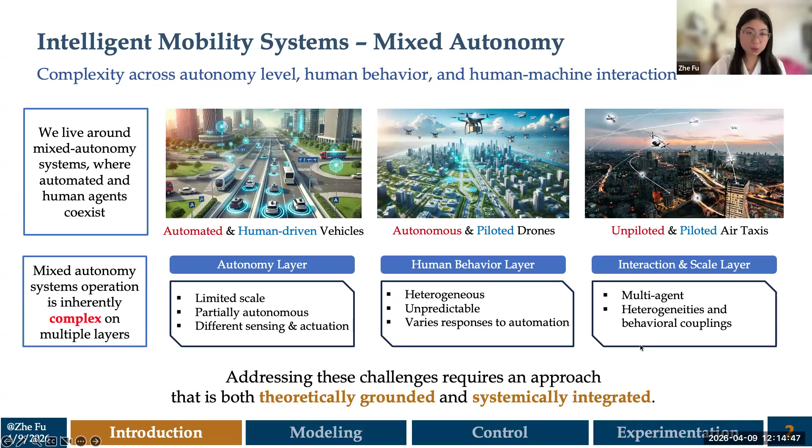So altogether, these factors make mixed autonomy systems very challenging to model, predict, and control. So addressing these challenges requires an approach that is both theoretically grounded and systematically integrated. So what do I mean by theoretically grounded? My approach is what I call model-informed learning, which means embedding physical principles and structural models into learning to achieve both interpretability and data efficiency.

So let's take a step back. In today's data-driven era, it's tempting to think we can solve every problem by just collecting more data and training larger models. But pure data-driven learning has clear limitations. It demands huge amounts of data and computational resources. It often lacks interpretability or physical consistency, and it generalizes really poorly when facing new or noisy environments.

Yet, before the era of large-scale computation, we already had centuries of physical and behavioral modeling, like governing laws, conservation equations, structural priors, and all the analytical models. So instead of discarding all these models, why not integrate them? By combining the expressiveness of data-driven learning with the discipline of physical and structural modeling, we can build models that are more data efficient, interpretable, and generalizable.

On the other hand, I believe that in complex systems, for example mixed autonomy systems, or our general mobility systems, to make a real impact, we need to co-design. And what do I mean by that? Instead of treating modeling, control, and experimentation as separate stages, where one comes after another, I view them as parts of closed loop systems that evolve all together.

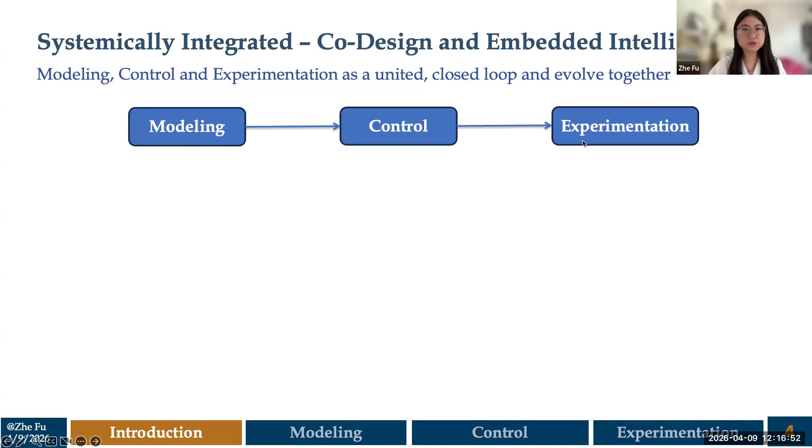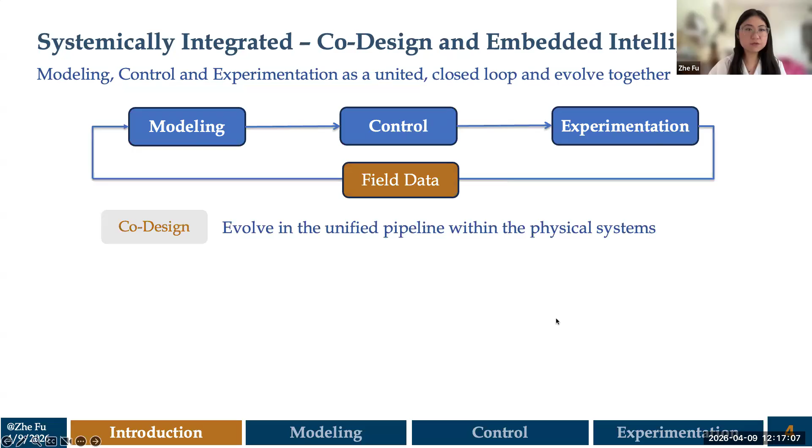So modeling informs control design, control design drives the experimentation, and experimentation generates feedback and field data, while the field data in turn refines the modeling. So this continuous loop is what I call co-design. Each component evolves in a unified pipeline within the physical system.

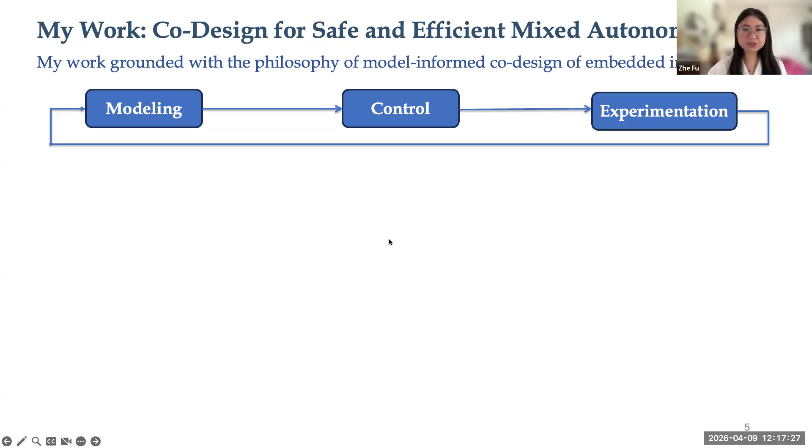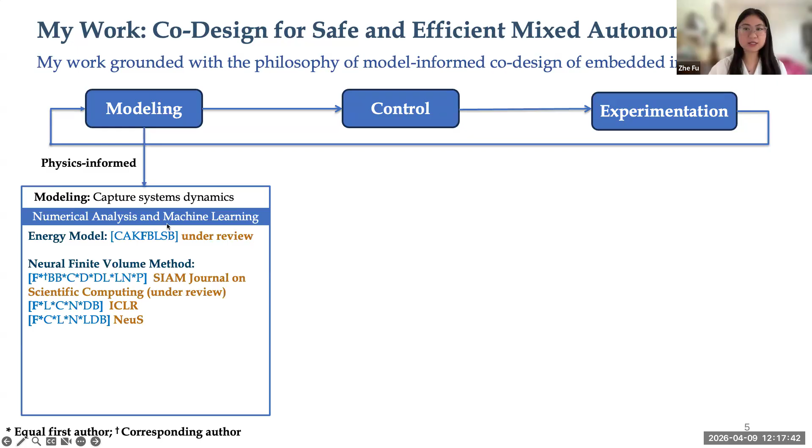So at a high level, my research is grounded in a model-informed co-design philosophy, and I view complex cyber-physical systems as requiring these three components. During my PhD, my work spans all three layers. Here is a brief research summary. On the modeling side, I combine numerical analysis and machine learning to model large-scale systems such as energy consumption and traffic flow. And on the control side, I mainly use control theory and deep learning to design algorithms that steer the system toward desired behaviors.

For example, I use control theory to develop wave dissipating controllers for traffic, and also safety guaranteeing strategies based on control barrier functions, anomaly detection schemes, and smart charging optimizations. And on the experimentation side, I validate these ideas in practice and collect valuable data. This includes the 100 automated vehicles field test CIRCLES. That's the project that Professor Wang mentioned at the very beginning.

I also use a Cadillac XT5 as a mobile data collector to record stop-and-go waves in the Bay Area. And I also participated in a BMW smart charging pilot that provided rich real-world charging data.

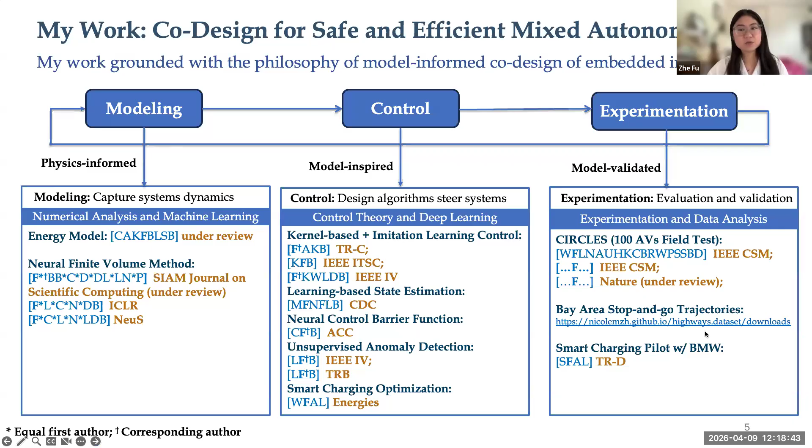But for today, due to the time constraint, I want to mainly focus on a topic about traffic smoothing, and I want to highlight the core theme, which is achieving system efficiency through a few automated agents in mixed autonomy traffic. So just to give you a little bit of background. One common traffic inefficiency in our current ground traffic system is stop-and-go waves. And those stop-and-go waves actually emerge without any bottlenecks, accidents, or infrastructure issues. It's purely from human reaction and delay.

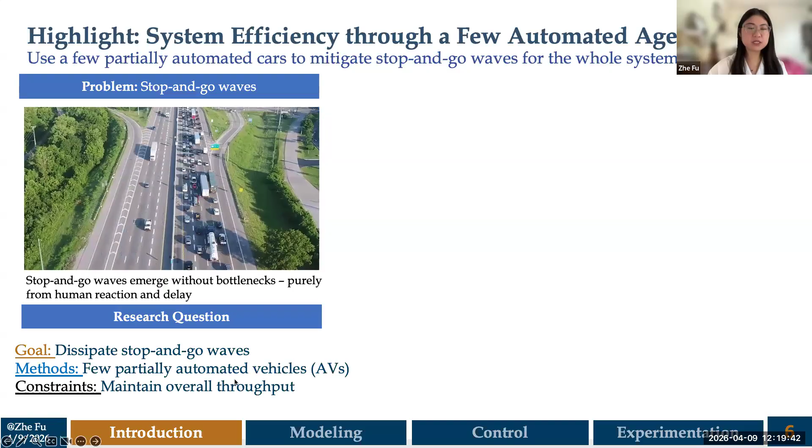So our goal is exactly to try to dissipate those inefficiencies. The method is we aim to use only a few partially automated vehicles to dissipate the stop-and-go waves, but with the constraint of still maintaining the overall throughput. So we don't want to harm the current traffic efficiency of the highway.

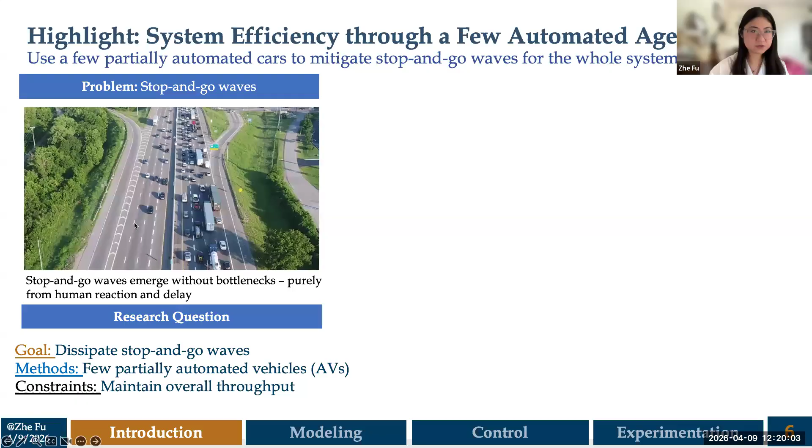And so for this specific research question, our logic is that we treat those automated vehicles as robot managers within the system, and we deploy some control on top of that. And those cars will have some influence on the rest of the cars following them. So it's like they shepherd the human-driven vehicles behind them.

And for this goal, we actually follow the co-design structure that I motivated at the very beginning in terms of modeling, control, and experimentation. So for the modeling part, the main idea is that we want to understand the dynamics of the current system we're tackling so that we can gain some traffic state estimation, for example, what's going on downstream. And then that would be super helpful information for the downstream control layer,

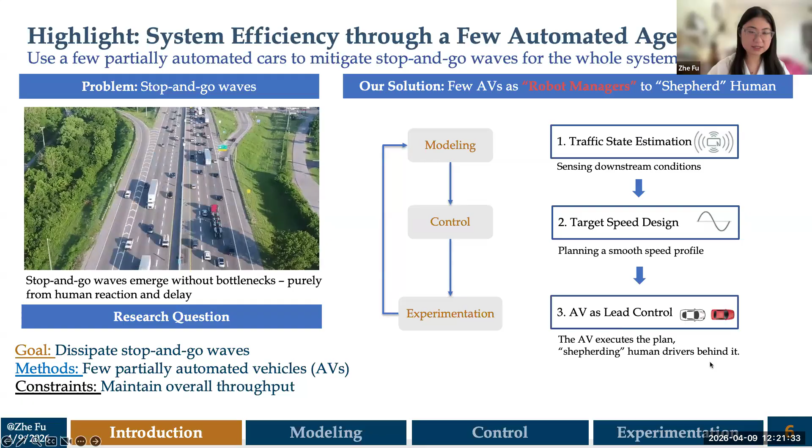so that we can design a target speed planning for a smooth speed profile for the vehicles to drive with. And in the end, we wanted to deploy that onto the few automated vehicles that we have control over, so that it can behave like a leader to shepherd the human drivers behind it. So I want to give you some sense about what the hardness is and what the solution is for each of the layers.

For the modeling part, the main difficulty for these traffic systems is that the traffic wave actually contains a lot of discontinuities, and at the same time we might have very limited data. So the solution we propose for this part of the problem is we develop a new physics-informed neural solver, and we call it NFVM.

And for the control layer, the problem is mostly that the few automated vehicles that we can control are still partially autonomous. They're not fully autonomous vehicles. And also they vary across different manufacturers. So we need to deal with the heterogeneity between all of them. And for that, I propose two different control strategies. One is based on a kernel-based planner, and the other one is imitation learning control.

And on the experimentation side, when we try to deploy all those control strategies on real cars, some communication delay would come in, and also there's a huge sim-to-real gap. And the solution that we propose is to do more model-validated and feedback-loop deployment.

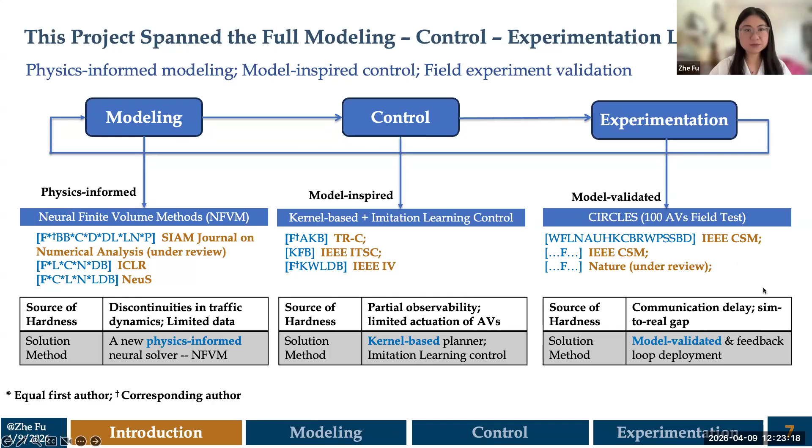So let's dive into the first module, the modeling part. I think I will give you a first sense of what we really did here, like a summary, and then I will dive into the details. So I want to point out that the technical innovation here is that, different from previous physics-informed machine learning approaches, which add the PDE structure directly into the loss function, we actually keep the core finite volume method structure to hard-preserve the conservation laws, but use a neural network to approximate the numerical flux.

And this design achieved many crucial results. The solver that we developed can outperform all known finite volume numerical schemes across multiple hyperbolic PDE models and multiple noisy traffic field datasets. And importantly, it matches the computational cost of first-order finite volume schemes. So this is a solver, but in the end, when we try to apply it and make it useful, it can provide an accurate and robust tool for traffic state estimation and prediction, which supports our further simulation and control design.

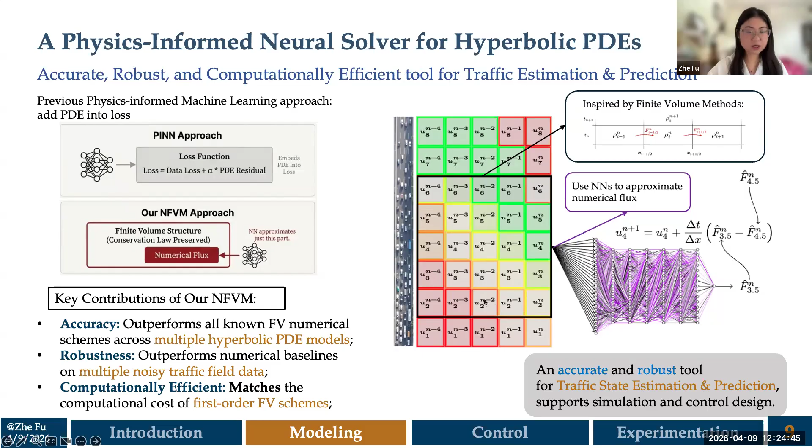So let's dive into the details of that. I believe everybody here doing transportation-related research is quite familiar with those models describing traffic flow dynamics. But I still want to highlight it: 70 years ago already, people proposed the LWR model, which is an elegant first-order scalar PDE model to describe the dynamics. And later, people added more equations describing momentum, and also expanded the current 1D into 2D, for example, the ARZ model. But all of them together are hyperbolic PDEs.

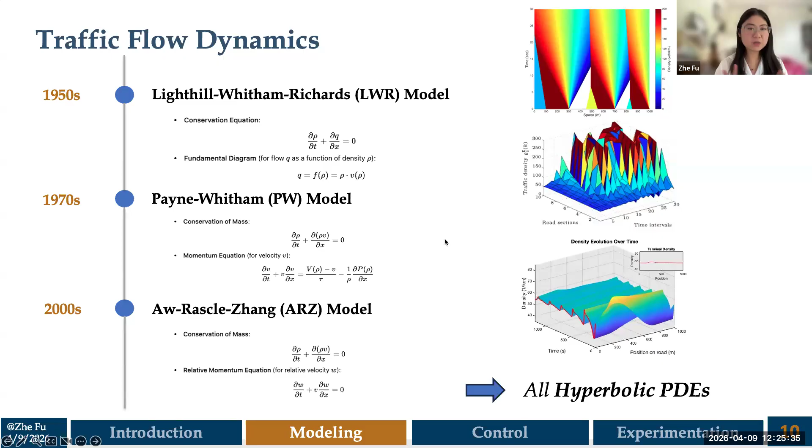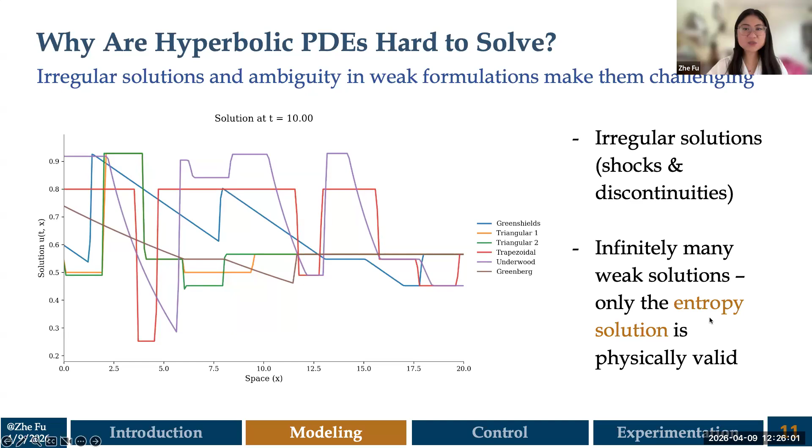And these hyperbolic PDEs are super hard to solve. Why? Because these PDEs create troublesome solutions like shocks and discontinuities. And moreover, mathematically, there are infinitely many possible weak solutions, while only the entropy solution is physically valid. And specifically finding that entropy solution is very challenging. Traditionally, we use finite volume methods to solve these hyperbolic equations. However, these classical numerical solvers tend to oversmooth shocks.

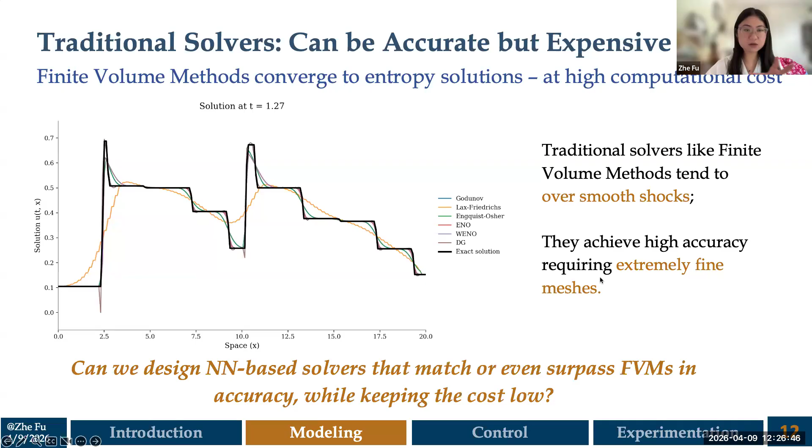For example, on the left-hand side, you can see the Lax-Friedrichs, which is a very famous finite volume solver. At the discontinuities here, it definitely oversmooths too much. And so this motivates us with the question: can we design a neural network-based solver that matches or even surpasses the traditional finite volume methods in accuracy while still keeping the computational cost low?

For the current neural nets, we did a kind of literature review to see what the current existing neural network solvers are. But those solvers tend to struggle with preserving the regularity and also entropy conditions and conservation laws.

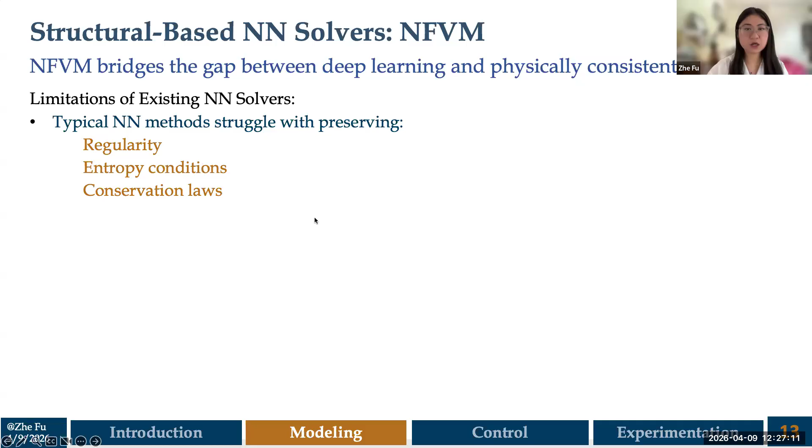So we were thinking, okay, for our new solver, what are the properties that we want to have? First of all, we wanted to preserve the essential PDE properties. And then we wanted it to be efficient, so it can match the computational cost of finite volume schemes. And also, since we already use a neural network, we want to take advantage of that.

We want our solver to have a flexible architecture that supports both supervised and unsupervised learning. And we want it to be flexible, generalizable, extensible to higher order in space and time, and not just focusing on synthetic PDE data, but able to literally apply to the field and to real world data.

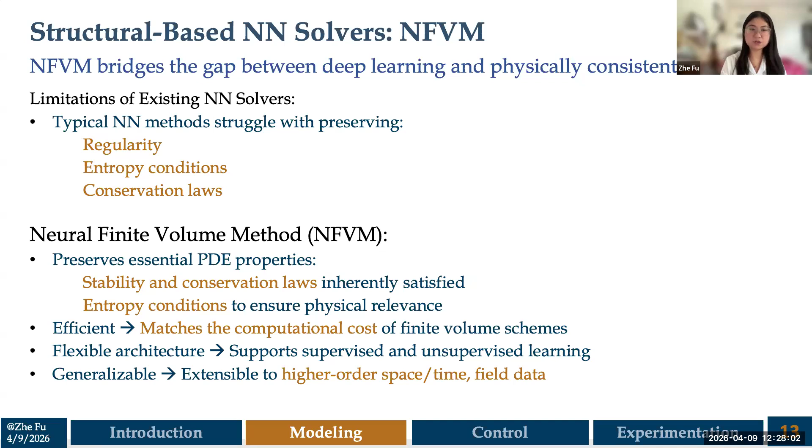So before I introduce our method, which is the NFVM, Neural Finite Volume Method, let's quickly revisit the finite volume method, since our architecture is designed to mirror the FVM-like structure. For FVM, we discretize space and time into small cells. Within each cell, we track the average value of the solution, and here we use density as an example. Then using the conservation law, we update the value in each cell at the next time step. This update depends on the numerical flux, which captures how much stuff flows across the cell boundary.

Specifically, for a first order finite volume method, we only need 3 cells as input: the left, middle, and right. Based on this, we apply the fixed update rule derived from the conservation to compute the density of the center cell at the next time step.

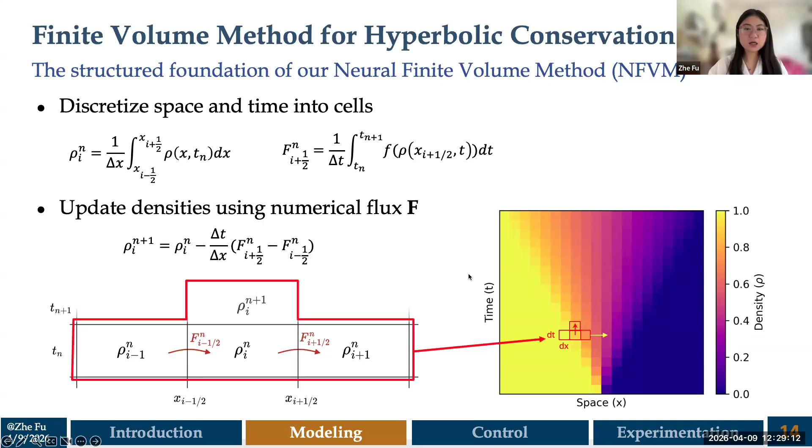Now here is the key shift that defines our method. In the classical finite volume method, the core of the update is the numerical flux, and that is usually a function designed by hand, like the Godunov scheme as we illustrated here. What we propose is using a neural network to replace these handcrafted flux approximations. In a first order scheme, it takes in the density of the 2 adjacent cells and outputs a learned approximation of the flux across their boundary.

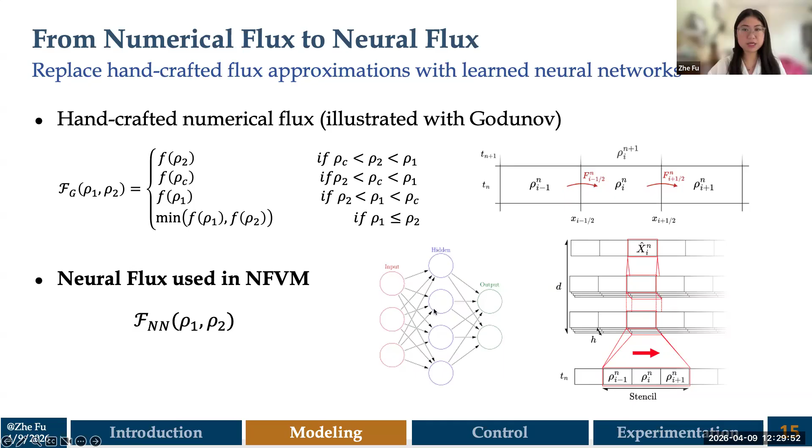At the same time, we can also obtain the numerical flux between cell 2 and cell 3 to feed it back into the update rule. Then we can get the density of cell 3 at the next time step. This process can be conducted simultaneously across the space at the same time step.

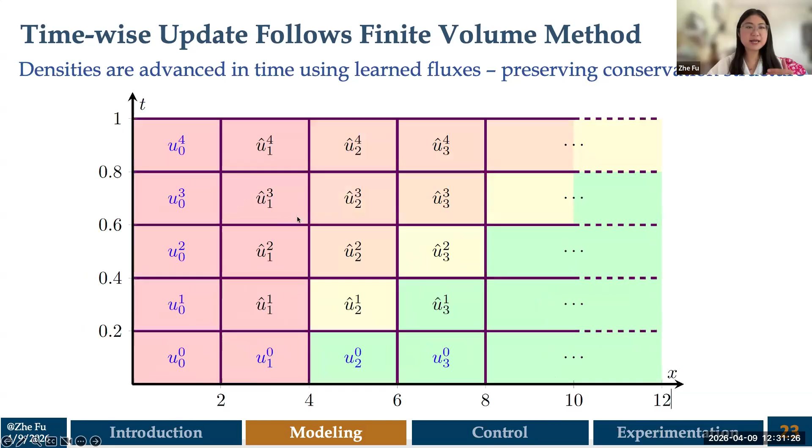Over time, we update the cell densities exactly like in the traditional finite volume method. At the initial time step, we obtain the numerical flux across the space from our neural network, and then we obtain the next time step's density with the update rule. Then we need to fill in the boundary condition here, and the procedure continues as in the previous time step. We do it step by step until we obtain the whole forecast.

So now you might already get our framework from a high level, but what neural network did we use for the numerical flux approximation? In this work, we use a surprisingly small convolutional neural network, which contains less than 1,200 parameters. And our framework can support both supervised and unsupervised learning.

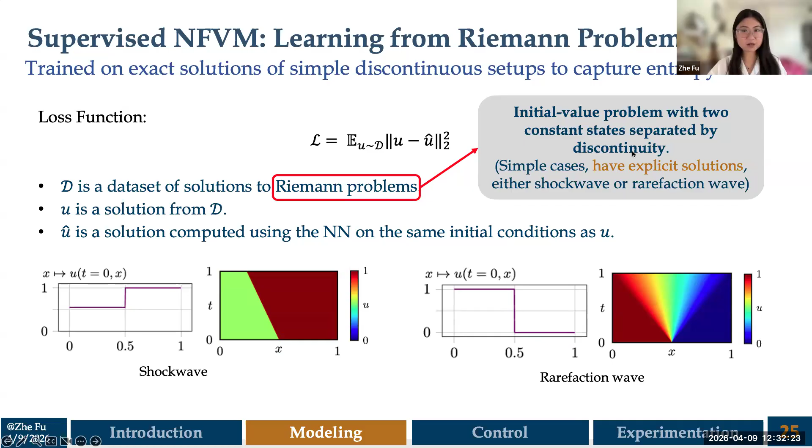In supervised NFVM, we trained on a bunch of Riemann problems. Those are initial value problems with 2 constant states separated by a discontinuity. These are simple cases which have explicit solutions, either shock waves or rarefactions as shown. We train on many of these simple cases, but later we validate on much more complex conditions.

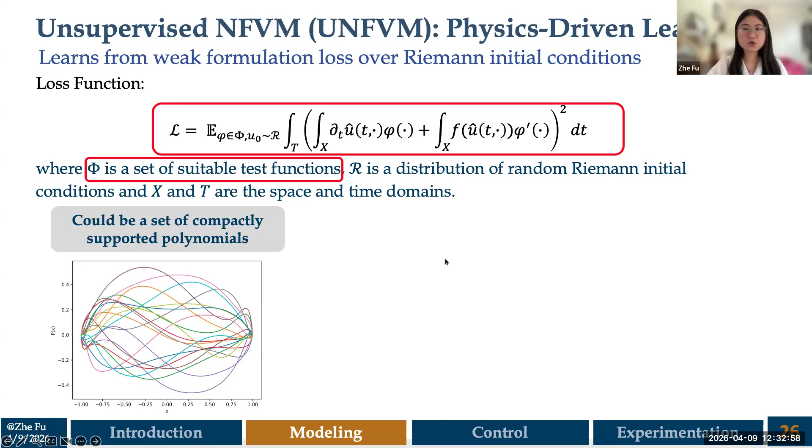However, in many cases, we won't have access to the exact solutions to the PDE that we're trying to solve. Therefore, we developed the unsupervised scheme, which learns from physics directly via a weak formulation loss with a set of suitable test functions. The loss measures how well we respect the PDE. In our test, we use a set of compactly supported polynomials as the test functions. And it was trained on many random Riemann initial conditions, but this time we don't know the solutions.

Now you already learned the framework and the neural structure of our method. Let's take a look at how our method performs. So initially for the synthetic PDE data, we picked two well-studied categories of hyperbolic PDEs as the benchmark problems. The first family is the LWR model, and the other one is the inviscid Burgers' equation.

And one thing I need to point out is that the LWR model contains the flux function in the PDE, which reflects our concept of the fundamental diagram. People who have a transportation background already know that we have several different ways to fit the flux function, and they vary from each other. And actually, if we plug different flux functions into the PDE, it ends up as a different variant of the PDE itself.

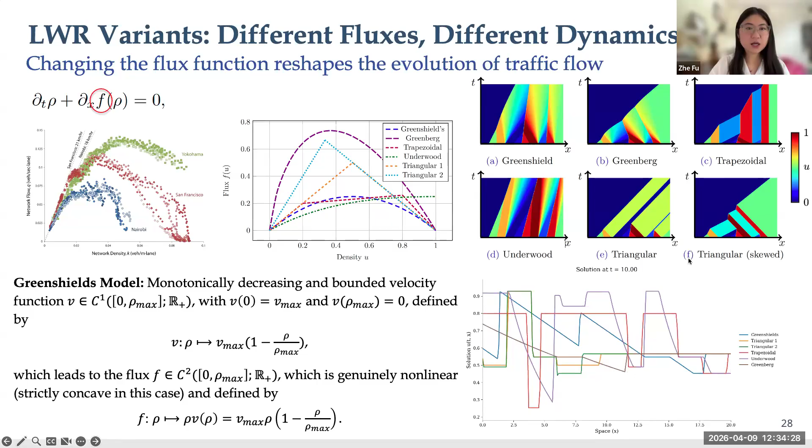And for this work, we specifically take a look at the Greenshields flux function, Greenberg, trapezoidal, Underwood, triangular, and also a skewed triangular. And now let's first take a look at how our method performs on those benchmark PDE problems.

So we run validation on all 7 different PDEs, and each PDE across 1,000 complex initial conditions. And we compute the average L2 error for each of the models, including the supervised and unsupervised versions of our method. And we compare them first with the first-order finite volume schemes, and it can beat all of them. And Godunov, among all 3 of them, performs the best.

And we also compare with the higher-order finite volume schemes, including ENO and WENO. And the results again show that we can rival the accuracy of the higher-order finite volume schemes. And one interesting thing I want to emphasize here is we also pick a finite element method, which is discontinuous Galerkin. This is a very well-known method for improving accuracy, but it incurs a very high computational cost. And also its implementation is way more complicated than most of the finite volume schemes.

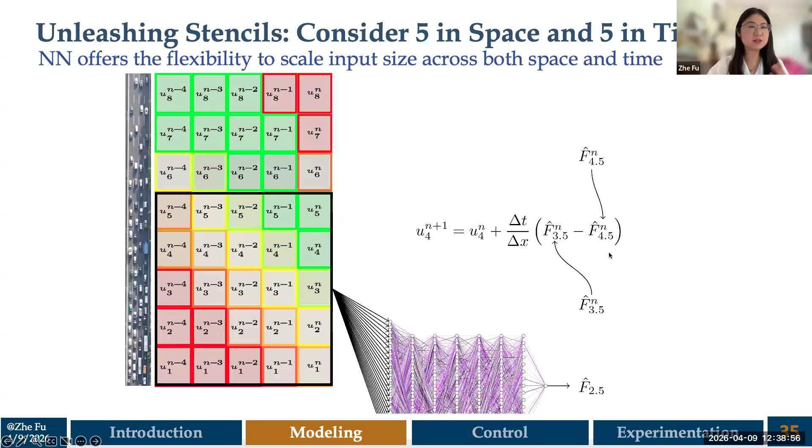And so then the question will come: okay, you extend your input, how much computational cost do you increase by that? And to be honest, when we extend from the vanilla NFVM to 5 times 5, there's not that much of a parameter increase. Even here, it's less than 1,600 parameters in total.

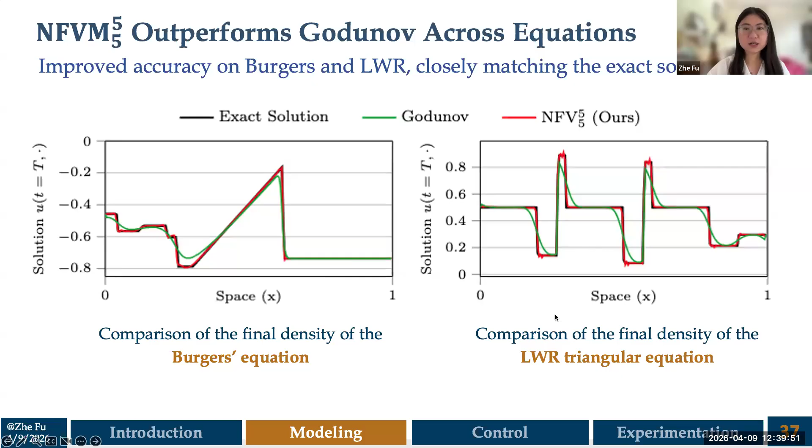But actually it performs surprisingly well. And here I show you the results on both Burgers' equation and the LWR triangular equation. Previously, we were much closer to Godunov, which is one of the first order finite volume schemes. But now we are much closer to the exact solution, which is the black line over here. And even over long evolutions, NFVM consistently tracks the exact solutions, clearly surpassing the baseline, Godunov.

And besides those PDE synthetic data benchmarks, I also want to show you how our method performs on real world data. So here, we start with drone-captured highway data, the B3D dataset collected by our lab, led by our previous lab mate, Fengyu Wu. That dataset contains 12 videos recorded by a drone above a highway, and it contains 15 minutes of data.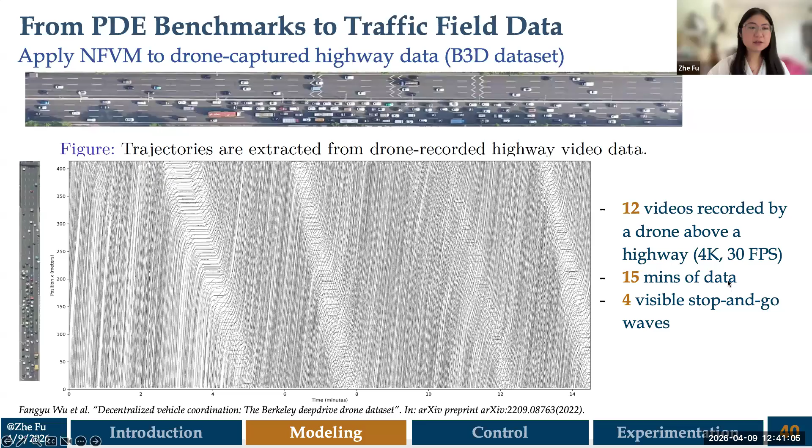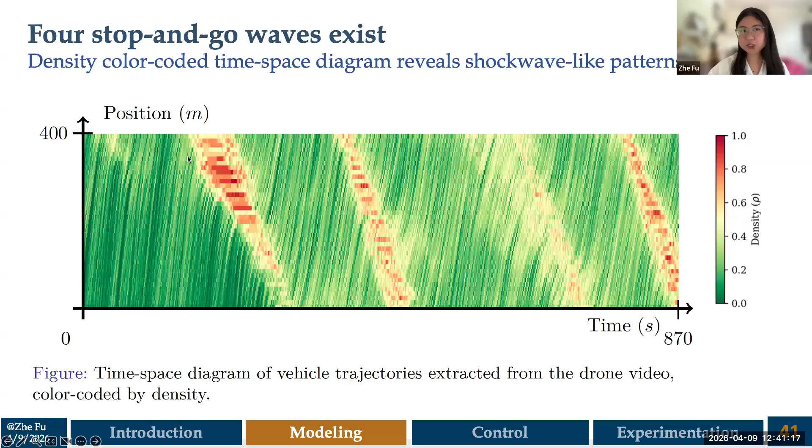And here you can see 4 visible stop and go waves. In this plot it's more visible. We colored it with the density, and the waves and the direction of the free flow are more visible here. And we trained only on the last wave, which is 70 seconds of the whole dataset, composing only 8% of the dataset. And then we evaluate on the first 800 seconds, which is the remaining 92% of the data.

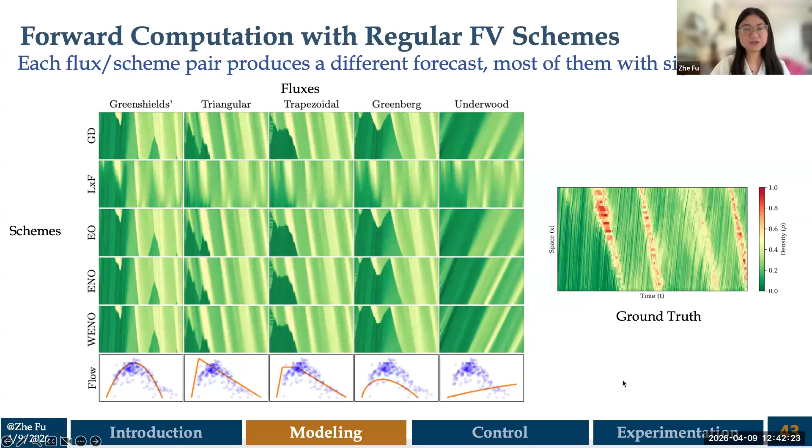So that is a quick overview of our method in terms of how we try to model the traffic dynamics and how it can actually achieve the task of traffic prediction. And I want to pause a little bit here in case anybody has some questions for this first part. If not, then I will proceed to the next module, which is control.

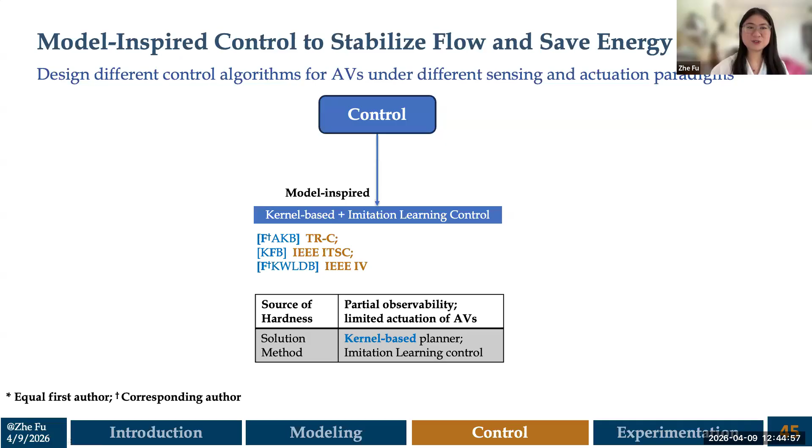Okay, sounds good. And then with the understanding of the traffic dynamics, I would love to think about how we can insert some intervention into the system so that we can help the system solve some practical problem or improve the system efficiency and performance. And in this specific traffic smoothing task, as I mentioned, our challenge is that we only have a limited amount of control over the actuators, and among them there is also partial observability and control.

And just to quickly drag you back to the topic, our current mixed autonomy stage, in terms of automation level, is mostly level 2, which is adaptive cruise control, not fully autonomous vehicles. On the coordination level, only a few automated vehicles are available on the road. And on the system level, there is heterogeneous automation, which means different cars might have different sensing and actuation abilities because they're produced by different OEMs.

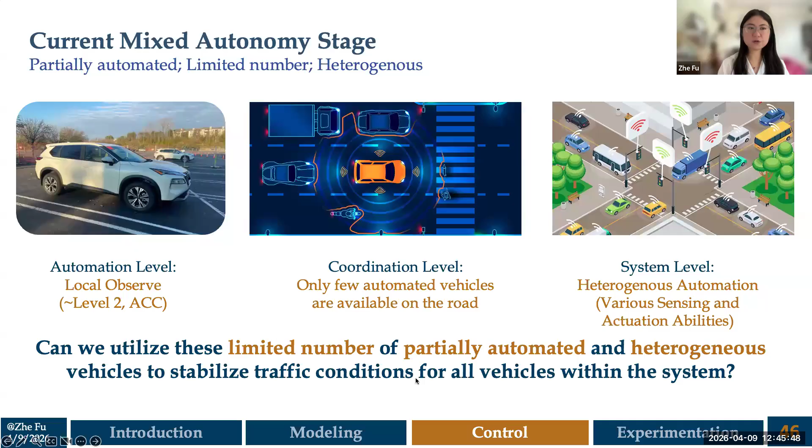And just to quickly remind you, the question we are trying to tackle here is: can we utilize this limited number of partially automated and heterogeneous vehicles to stabilize traffic conditions for all vehicles, not just those vehicles that we can control within the system?

And from my perspective, I actually propose two different control strategies or algorithms under different sensing and actuation paradigms. The first one is a kernel-based planner, and it is using kernel planning for target speed design. And the other one is the imitation learning control, which is mimicking the optimal driving behavior under uncertainty.

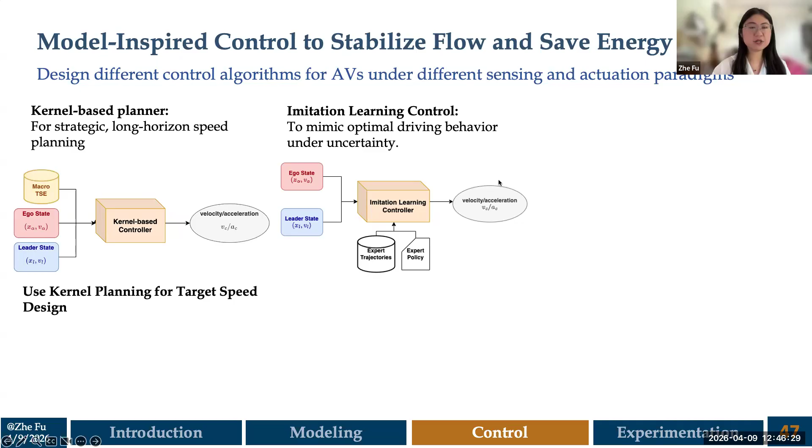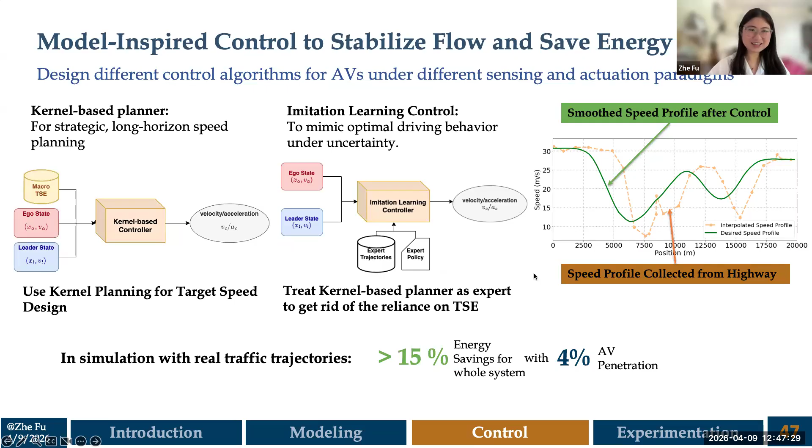And with these two control strategies, I validated them both in simulation with the real traffic trajectories. In summary, with just 4% of AV penetration, we can already achieve over 15% energy saving for the whole system. That's in the simulation. So that gave you a high-level picture of this piece of the work, and I will dive a little bit into the details.

To better understand my control algorithms, I would love to set up some problem setting here. Take a look at this single-lane highway, and there are a bunch of vehicles following each other. The red cars are the cars that we are trying to control. Those are the control automated vehicles. And those vehicles have the radar, so they can sense what's going on for the leader vehicle.

And we marked this leader vehicle, the sensed human-driven vehicle, as blue. And for the rest of the vehicles, we mark them as white, and they're all human-driven vehicles that we don't have the ability to control, and we also don't have the ability to sense.

And I also would love to point out that we define some different sensing paradigms. For global sensing, we are saying that under that paradigm, we will have both the ego states, which is the red vehicle's position and speed, and also the leader state. And besides that, some traffic state estimation that we can obtain.

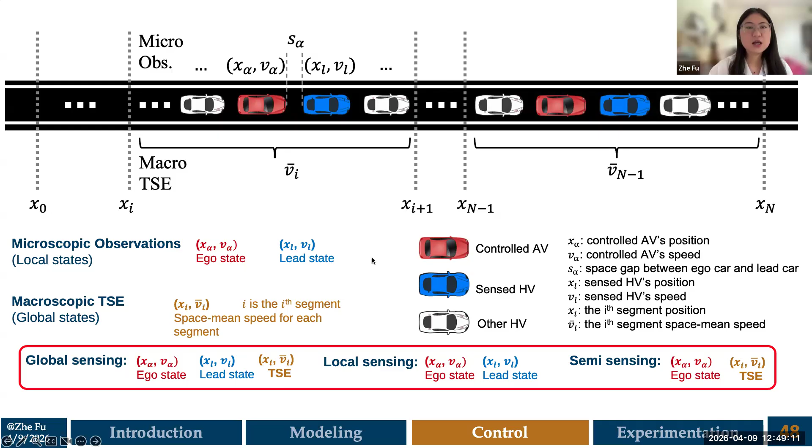But not every road is ideal such that we can have the traffic state estimation. So in some cases, we only have local sensing, which is just our control vehicle's information obtained from the leader vehicles. And that's exactly what motivates my two control algorithms. And they actually follow kind of the philosophy of teacher to student. Why do I say that?

Under global sensing, the ideal case, we have three categories of inputs, and the control structure would look like this: the input, and then we wish after passing our control algorithm, we will obtain smooth actions that can help us to smooth the traffic. And specifically here, the structure that I apply is mostly about the kernel planning.

But under local sensing, which means we lose access to the TSE, we're still thinking, okay, is there a way for us to just rely on the local information, but still produce a similar performance of the actions compared to the global sensing one?

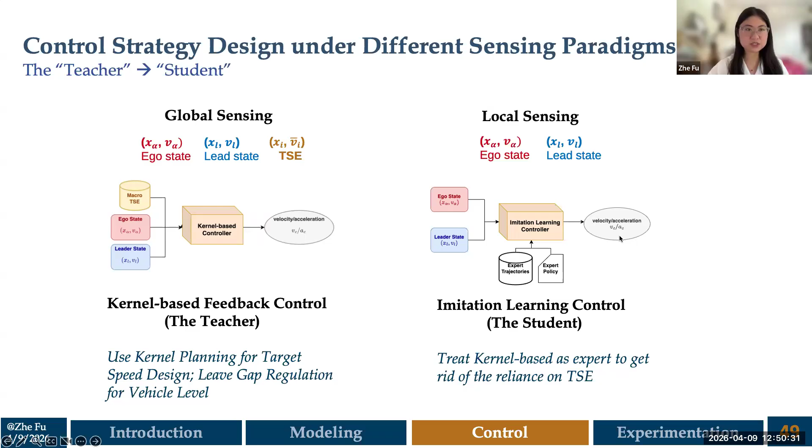So the idea is that I actually treat my global sensing algorithm as the teacher and kind of mimic it. That's why I call it the imitation learning control. Mimic whatever it is doing so that it can generate a bunch of actions that still match with the previous abundant information.

Then instead of driving right away over there and then stopping, you can actually plan ahead and decelerate smoothly. And that's exactly how this V-target serves. It's trying to aggregate the information from the TSE and give you a high-level signal saying that, okay, at this position, you'd probably be better to drive at this speed.

But because that information is really high level, loose granularity, if we just directly apply that speed, it possibly ignores what is feasible locally.

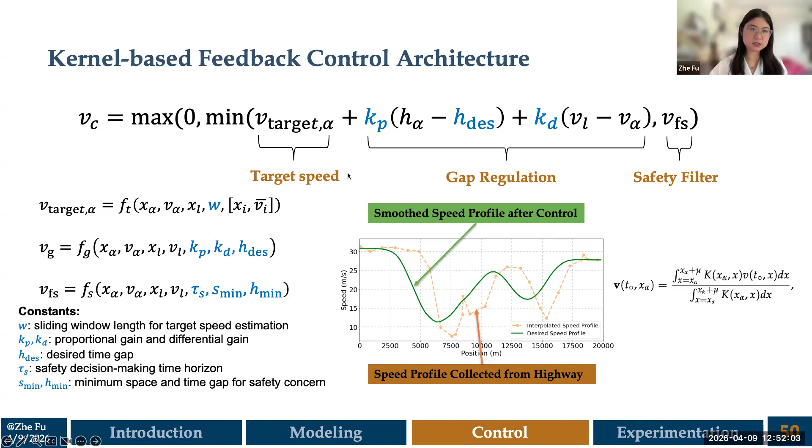So that's why we equip that with the lower layer, which is a PD controller that can do the gap regulation, and also equip that with the safety filter. So the kernel-based feedback control structure is like this.

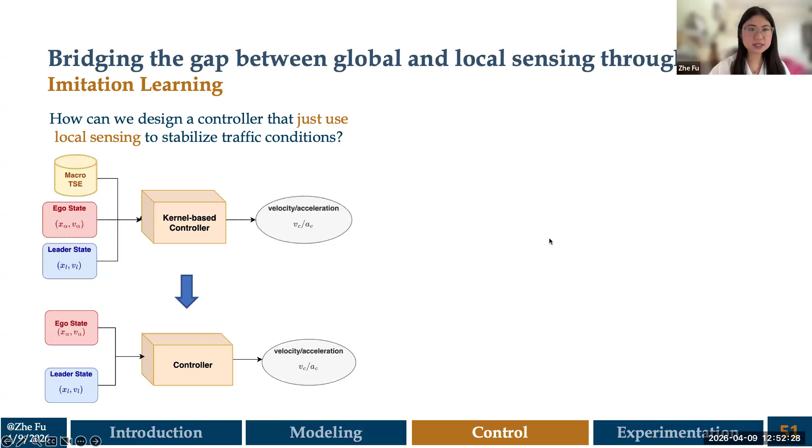While, as I mentioned before, not in every case do we perfectly have the TSE. So the question would come as, how can we just use local sensing to stabilize it, and design a strategy that gets rid of the reliance on the TSE? And that motivated me: okay, how about we use imitation learning?

I know in the autonomous driving literature, imitation learning has been used many times, but most of them are just trying to mimic whatever the human behaviors are. So here, the innovation is that instead of the human behaviors, we treat an expert policy, a previously developed algorithm, as the expert to mimic, while the main goal is to get rid of some reliance on the input.

For our method, we apply the DAgger algorithm in the training process, treating those global sensing control strategies as the expert to reduce the reliance on global sensing. We first initialize our demonstration sets and policy and collect the expert's actions, in our case the kernel control. Then we augment our state-action pair datasets with the collected pairs. This augmentation and online query help us alleviate a common problem in imitation learning, the covariate shift.

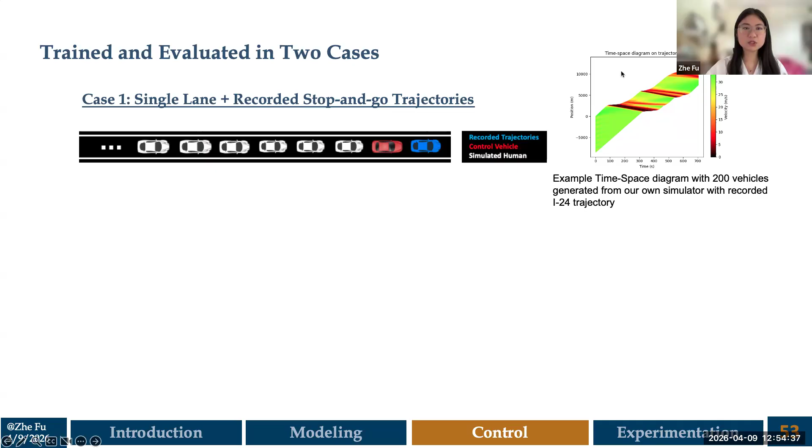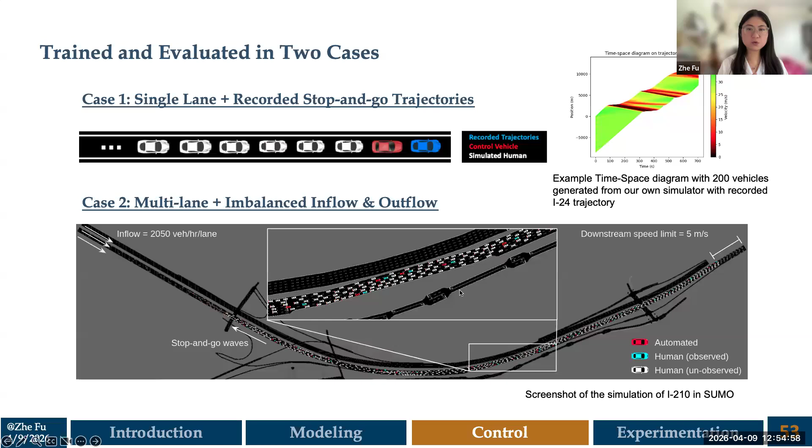And in that, each line represents one vehicle. I think this is generated with 200 vehicles. We also trained on a multi-lane setting where we build an I-210 network in SUMO, an open-source traffic simulator. For these cases, it's multi-lane, and we generate stop-and-go waves by imbalanced inflow and outflow.

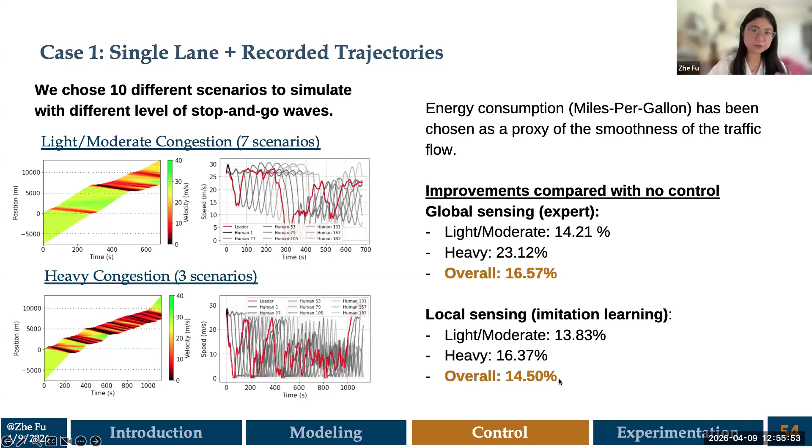To give you a little more detail, on the left-hand side is a case with no control applied at all. In the middle is our kernel-based control, and on the right-hand side is the imitation learning control. As you can see, in the significant congestion area, both our strategies actually smooth out this black area, and specifically take a look at the speed profiles.

At the very beginning, without any control, you can see the vehicle speed oscillation actually amplifies over time, while after we apply our control strategies, both of them eliminate the amplification of this oscillation. And for imitation learning, it actually shrinks a little bit.

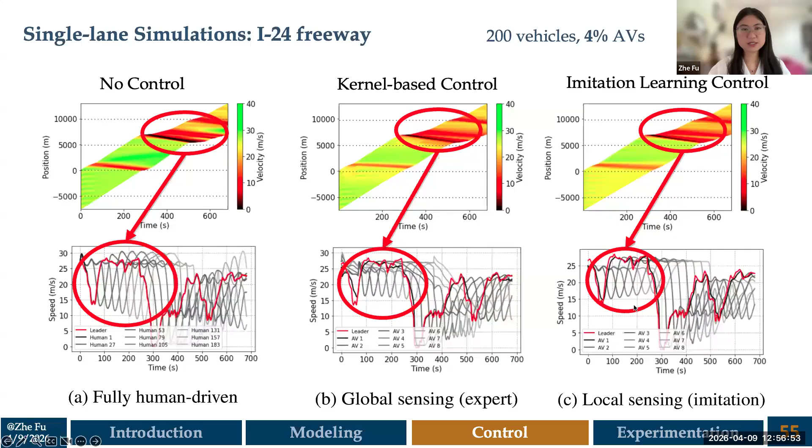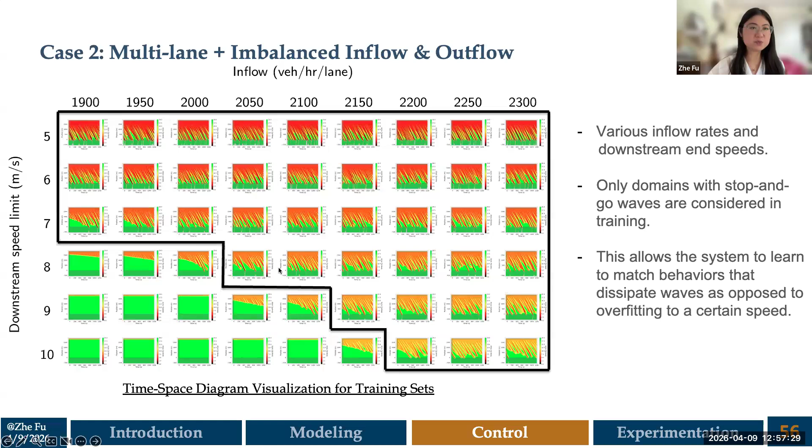For case two, the multi-lane cases, we randomize and enlarge our training domain by varying between different inflows and outflows. Each plot shows one scenario that we are testing on. We only pick scenarios with significant stop-and-go waves to train on. This allows the system to learn behaviors that dissipate waves, as opposed to overfitting to a specific speed.

Here is an animation showing the comparison without control and with control. This is with only 5% AV penetration. As you can see on the bottom, the flow actually drives significantly smoother compared to the upper one.

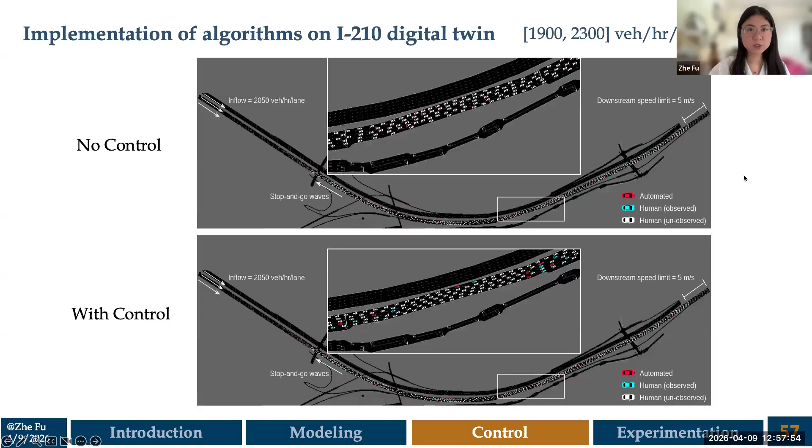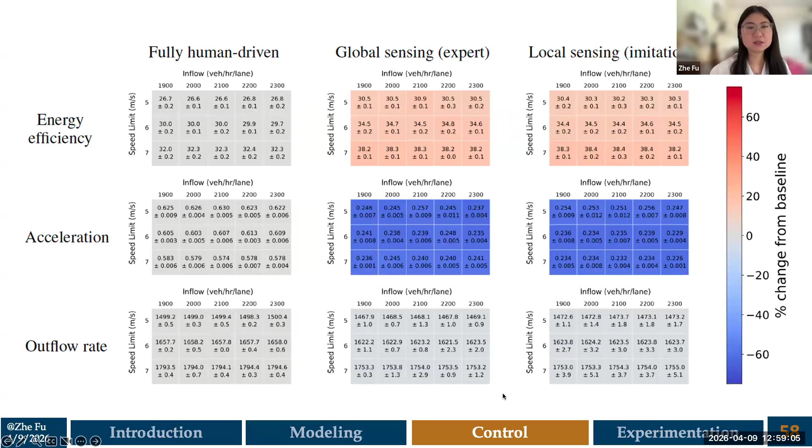So this success in simulation led to the validation in a large operational field test, which is the CIRCLES project. In the CIRCLES project, which is the largest mixed traffic field experiment to date, we deployed 100 automated vehicles on the I-24 highway.

And this is a national-scale collaboration project, including the NSF, DOE, the DOT, and many industry partners that kindly sponsored us with the cars that we control, from Toyota, Nissan, and GM. And it's a collaboration with 4 universities.

And specifically, we deployed it on the I-24 highway because over there is a really amazing project, and Professor Wang used to be part of it. It's I-24 MOTION. That testbed provides over 200 really high-resolution cameras along the highway, and it can provide us with all the footage of the cars passing by on that highway.

Because the goal of the project is not just to evaluate the performance of our control vehicles. We are more curious about how these few automated vehicles can impact the whole system. So we need to capture all the trajectories and the performance of all the other human-driven vehicles, while we don't have any monitors on their cars. So we need those cameras to capture all of them, so that we can further analyze the performance of the system.

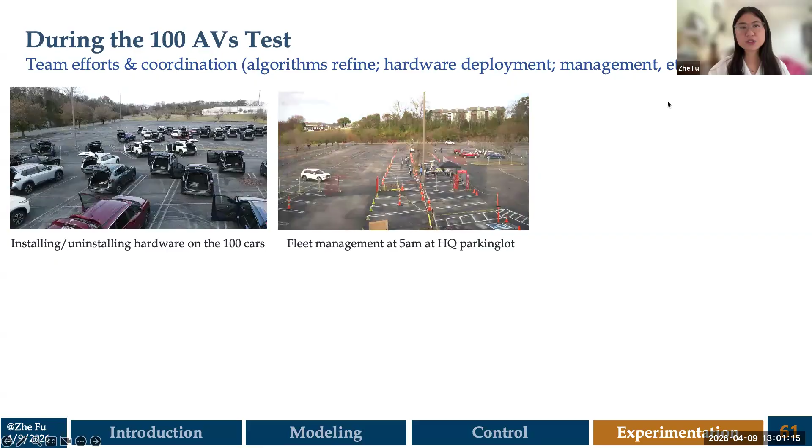And that test is a team effort and a great coordination among 50 researchers, and it included tons of different tasks, including algorithm refinement, hardware deployment, management, etc. And my contribution in this project is I helped design the core control algorithms, supported the energy modeling and evaluation, deployed the controller on hardware and cars, and also supported the experimental logistics.

To give you a little bit of a sense of how this test worked, I will illustrate with one typical day during the test week. Oh, by the way, yes, we conducted the experiment for a whole week. On a typical day, I usually arrive at the parking lot, the headquarters, at 5 a.m. to do the gear check for the driver of each car, and send them out, as this video shows.

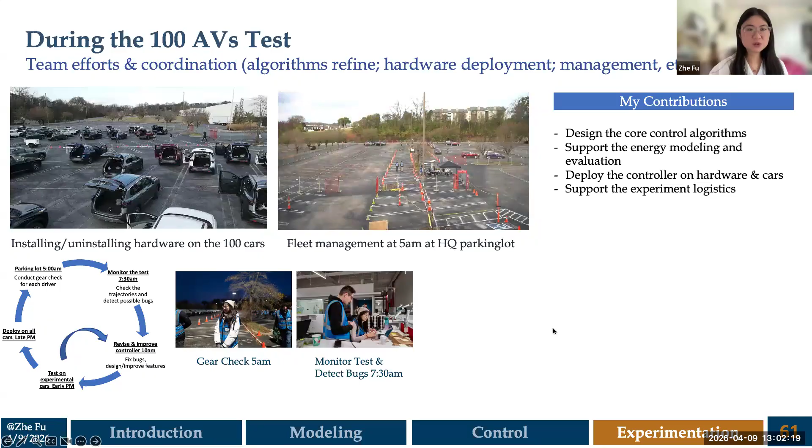You can see those vehicles at the headquarters departing one by one, and then they will come back one by one. And after sending all of them out, I will go back to the headquarters to monitor the test and detect potential bugs within my algorithm. And then after the test is concluded, I will try to refine the algorithm and improve the controllers.

And then in the early afternoon, we will pick a few test cars and deploy the refined algorithm to see how it works. And it usually requires several rounds of iterations. And then late at night, we will finally deploy the finalized controller for the next day to test on all 100 automated cars.

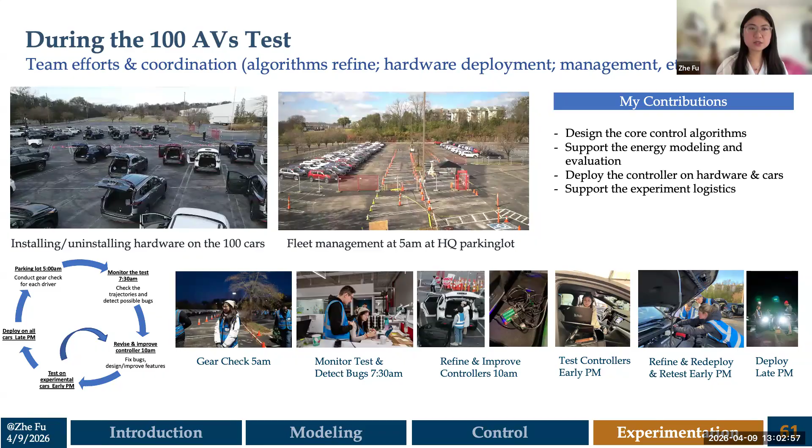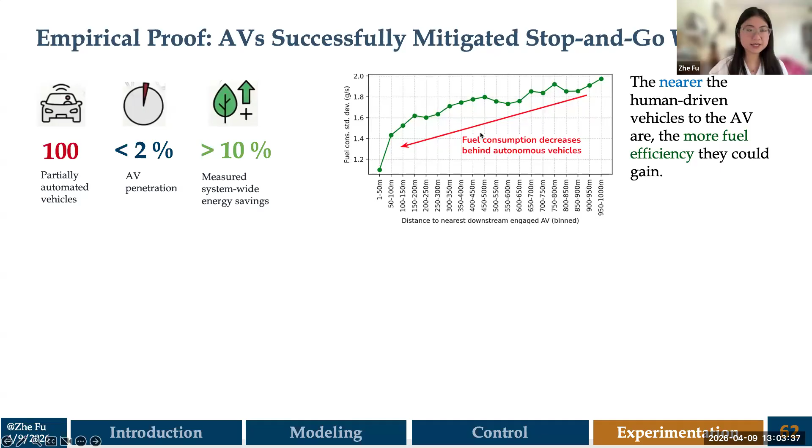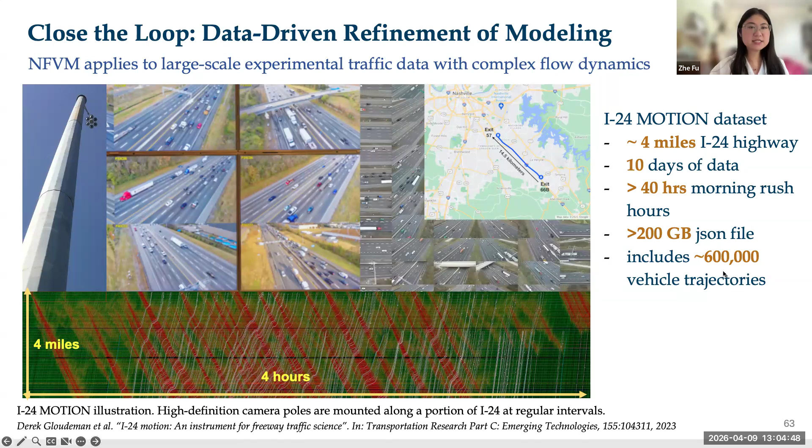And so I believe the I-24 MOTION team already released a public data set, which includes over 600,000 vehicle trajectories. And with this data set, we applied our NFVM with the first hour of one of the days, which is just composed of 2.5% of the data set, as the training set. And we validate that on the rest of the data.

So yeah, that's just a short teaser in terms of this piece of the work, but I think it already gave you a sense of how the whole co-design loop is going through in terms of the topic of traffic smoothing. So I would love to end my talk here, and thank you so much for your attention.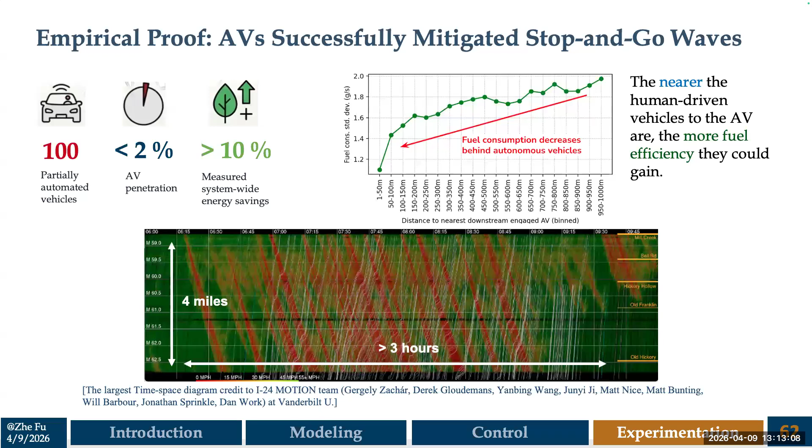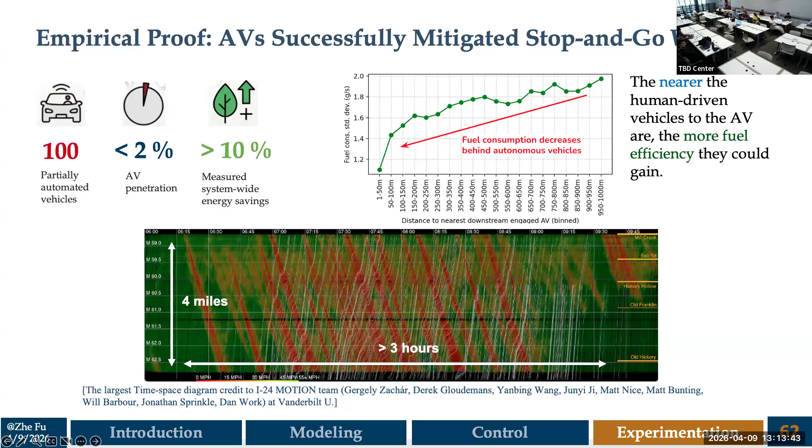Just one small one, and I think it'll be interesting for the students to also understand. Walk us through how you were able to do the breakdown of your testing and evaluation at such a very stark, sharp cut. You mentioned 92% was taken out for testing, right? Compared to the conventional Pareto principle, where 80% is for training. So walk us through how you were able to do that, and what are some considerations that students can be mindful of when they're parsing data like this into training, testing, and validation?

Yeah, I would love to do that. So I agree that for traditional machine learning tasks, we usually just divide it into 80% and 20%, or even divide it into training, validation, and testing. But here, I think we are more oriented to our terminal goal. This one is referring to the modeling part. We want to validate how powerful our solver, our method is. And as I mentioned before, our goal is to use as little data as we can to show that we don't need that much computational cost while still achieving satisfactory performance.

So that's why we only pick a very small chunk of data, even less than the traditional 20% or 10%. And also, I think it makes sense that the whole data set contains 4 different waves. Initially we designed it so that we grab just one wave and test on the other 3 waves and also the free flow. So I think it really depends on what you want to achieve in this specific task and what the real data set looks like.